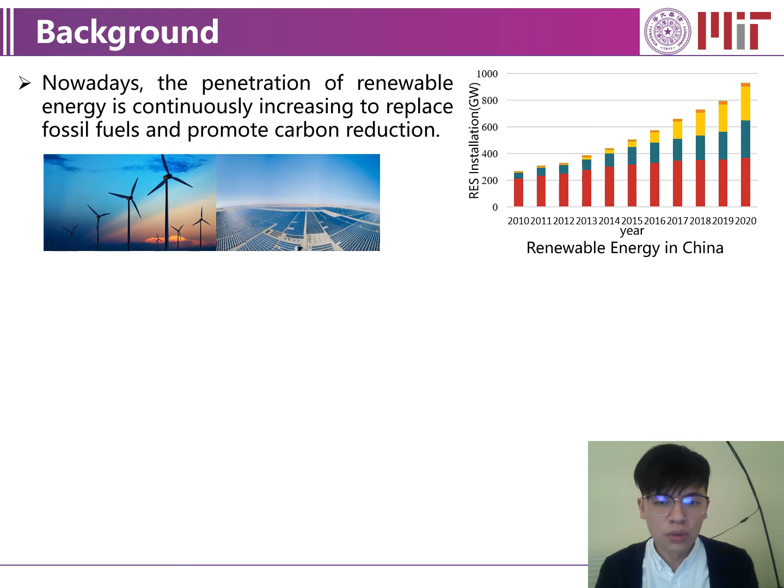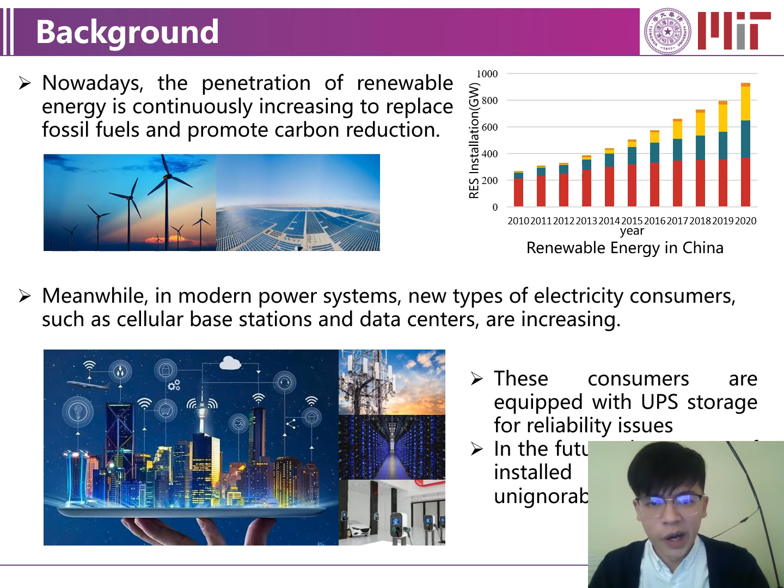Nowadays, the penetration of renewable energy is continuously increasing to replace fossil fuels and promote carbon reduction. Meanwhile, in modern power systems, new types of electricity consumers, such as base stations and data centers, are increasing. These consumers are equipped with UPS storage for reliability issues. In the future, the amount of installed UPS storage is unignorable.

On the one hand, with the increasing of renewable energy, it brings more uncertainties to power systems, so more flexible resources are needed. On the other hand, battery energy storage is a promising kind of flexible resource. So the question is, can we make use of UPS storage to provide flexibility to power systems?

Our previous work has shown that while providing reliability backup, some UPS storage facilities can have spare capacity that can participate in power systems, especially in high power supply reliability areas. And our previous work has also studied how to dispatch them or how to organize them to participate in power system frequency regulation.

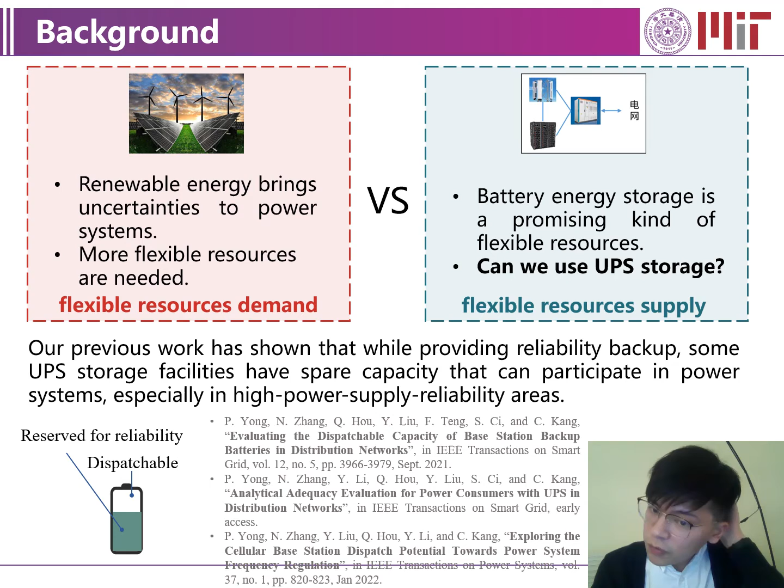In this research, we want to exhibit the contributions of UPS storage to power system load carrying ability, which is represented using capacity value. The concept of renewable energy capacity value has been widely applied in different power system analysis scenarios, and the capacity value of energy storage has also been studied by several researchers. But the capacity value of UPS storage hasn't been properly studied.

About the framework, we propose a three-stage framework to estimate the ELCC of the UPS storage. At the first stage, the power system operator calculates the system-level reliability indices without UPS storage using the sequential Monte Carlo simulation. So they provide a benchmark.

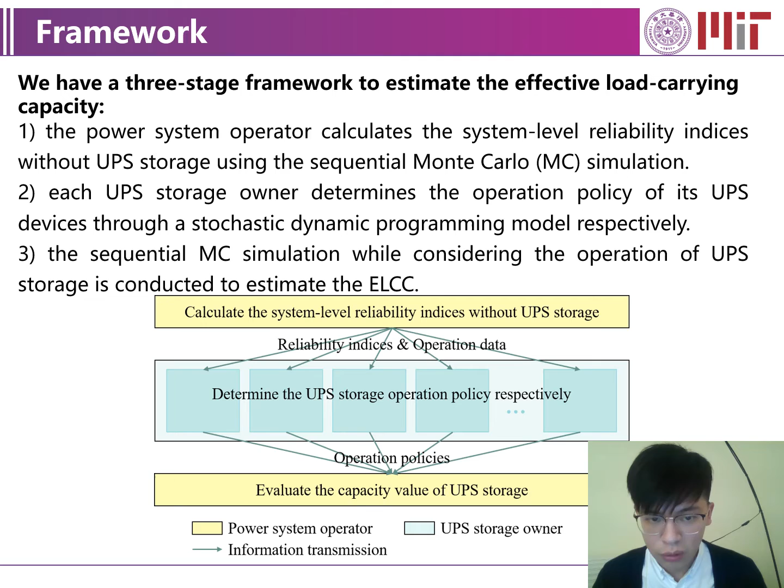For the first stage, calculating the system-level reliability indices without UPS storage, we should first build the reliability models. For the conventional generators, we use the two-state Markov model. For renewable energy, for example wind power or solar power, we can use the historical data, or generate new data using some renewable energy output model. For the power load, we sample from the historical data. The reliability evaluation time horizon is 1 year, and the sampling density is 1 point per hour.

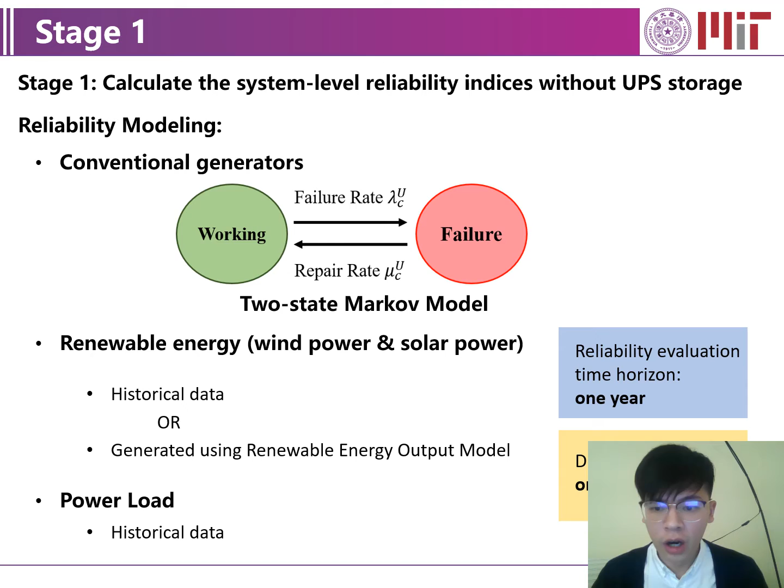Here is a simple flowchart of the sequential Monte Carlo simulation. In the first part, we sample from our reliability models. For example, for conventional generators, we sample from the Markov model. And for renewable energy and power loads, we sample from the obtained time series.

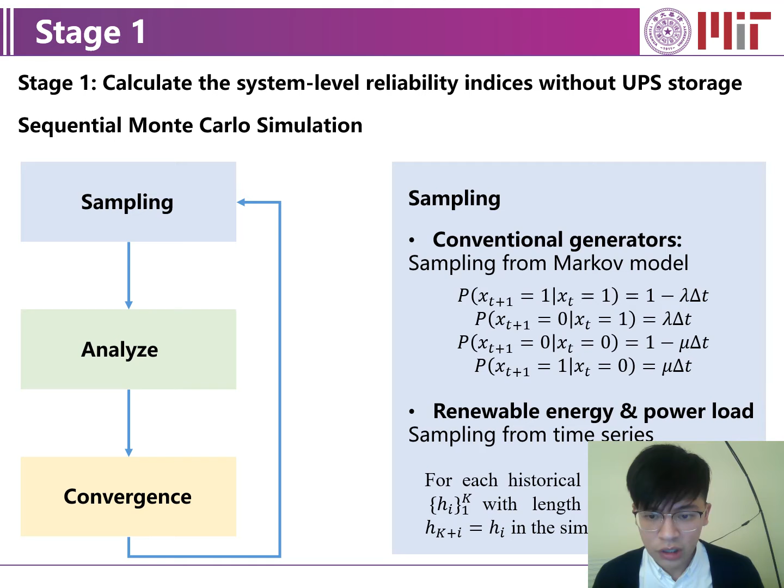Then in the second part, we analyze the obtained samples. For each sample, we judge whether the loads can be served by the generators or not. If we denote Gi and Di as the total generation capacity and the total power load at the i-th sample, we can compare Gi and Di to find whether, at this sample, all the loads can be served or not.

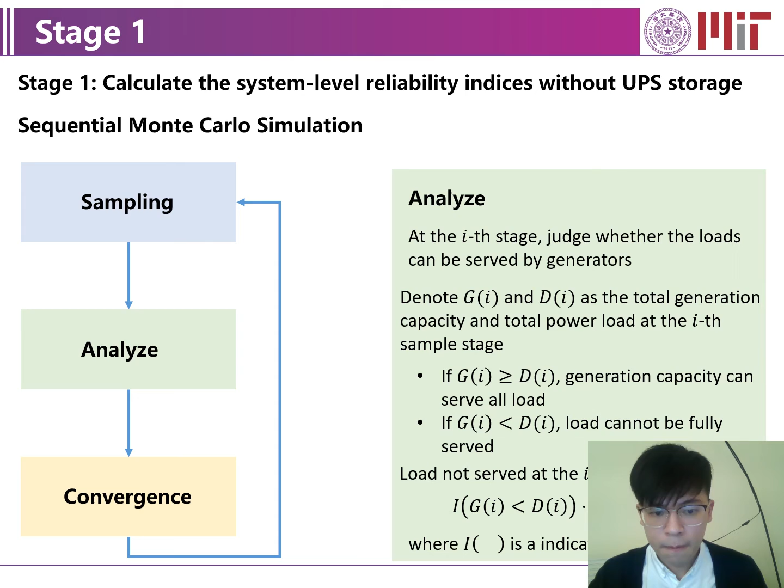Then, as the third part, we test the convergence. If the Monte Carlo simulation is converged at the current state, we output the evaluation results. If not, we return to the first part to generate more samples and analyze them, and then we retest the convergence. It's a loop until convergence is reached.

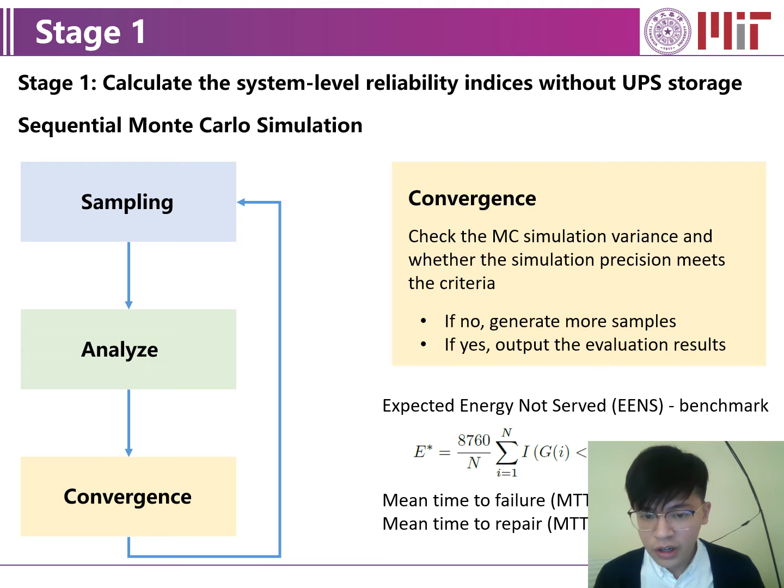Here we use the reliability index expected energy not served, that's EENS, and it provides the benchmark for the reliability level without the UPS storage. We also provide the mean time to failure and the mean time to repair indices for the following steps.

Then we move to the second stage, which is to determine the UPS storage operation policy respectively. Here we use a stochastic dynamic programming model. The reason is that solving the stochastic dynamic programming can provide policies that can be used in different scenarios, so it avoids repeatedly running optimization to obtain the state of charge of storage in each sample in the Monte Carlo simulation, so it's much more time efficient.

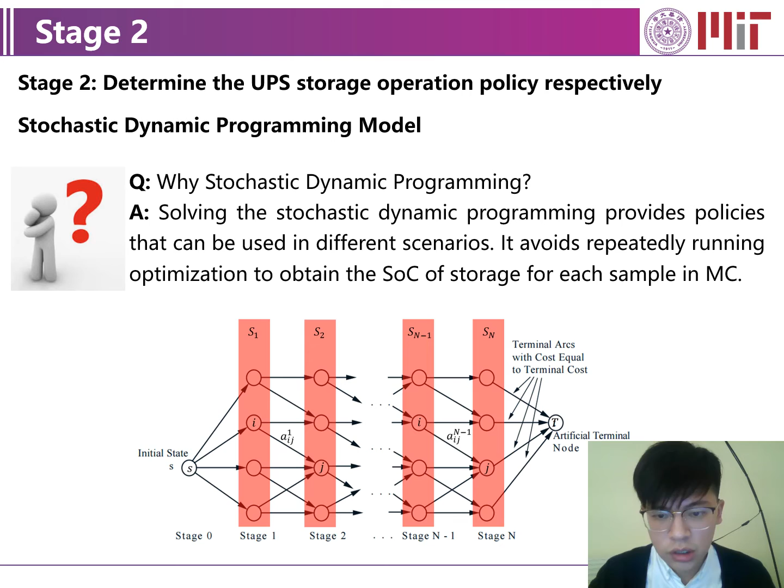Here are some model details about the stochastic dynamic programming. The decision stages of the stochastic dynamic programming are discrete in time, not continuous. The state variables at each time slot are the state of charge of the UPS storage, the electricity price, and the power system status.

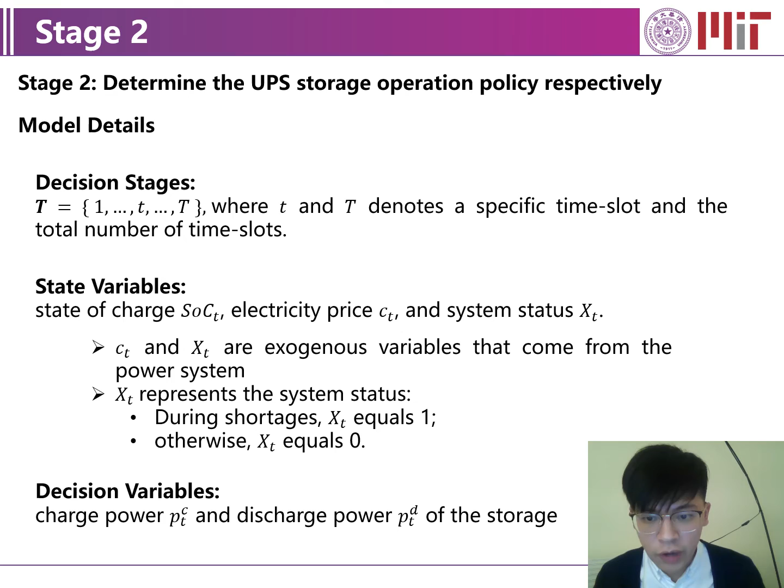Here, CT and XT are exogenous variables that come from the power system, and XT represents the system status. If XT equals 1, it means that there is a power shortage in the system. If XT equals 0, it means that there is no power shortage at this time slot. The decision variables for the model are the charge power and discharge power of each UPS storage.

The state transitions of the stochastic dynamic programming model can be divided into two parts. The first part is the deterministic part. It describes the energy conservation relationship of the UPS storage. The second part is the stochastic part. It represents the uncertainties of power system shortages. We construct a two-state discrete time Markov process to represent it. The parameters of the Markov process come from the MTTF and MTTR obtained in the first stage.

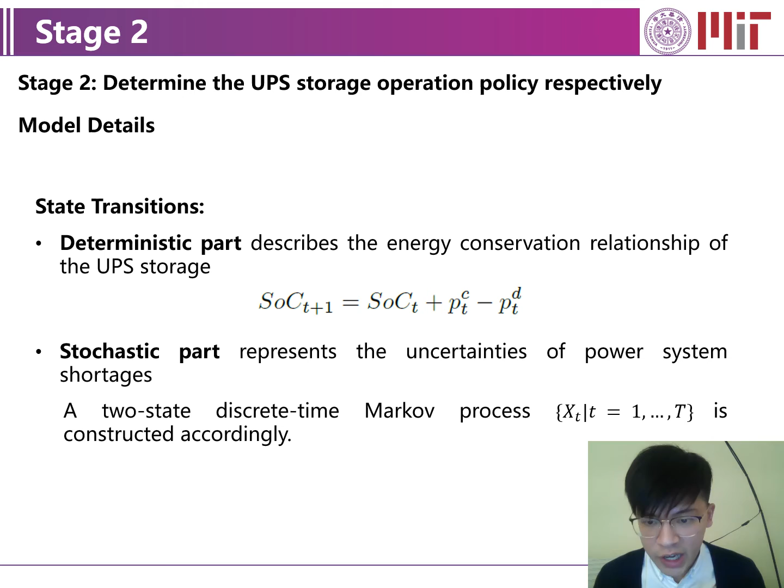As for the optimization target, we denote the state of time slot t as st, and the reward function of time slot t consists of two parts. The first part is the temporal arbitrage during normal time, and the second part is the reward from carrying load during shortages. So we use this optimization target to let the UPS storage do temporal arbitrage if no shortage happens. And if a shortage happens, we organize them to carry load as much as possible.

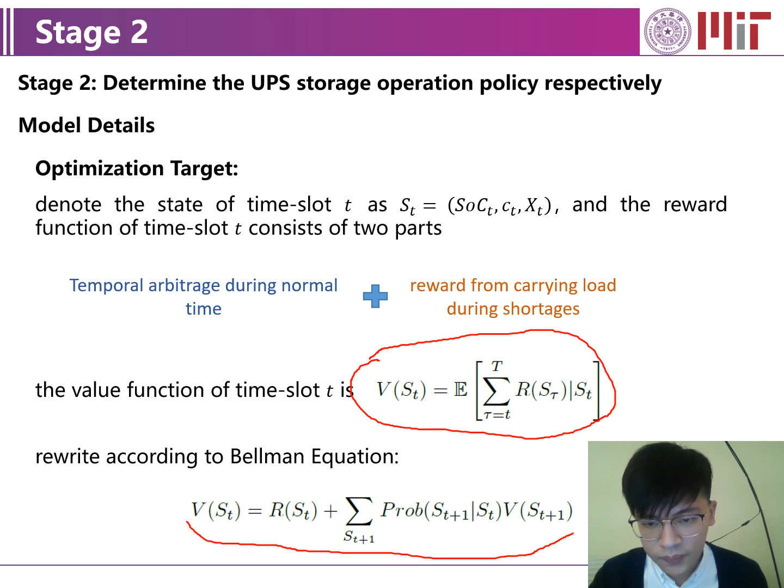The value function at time slot t can be represented as this. If we apply the Bellman equation, we can change it to this one. Then after that, we can solve this stochastic dynamic programming model. We discretize the state space and decision variables and use the backward recursion method, which is commonly used in solving dynamic programming models. Then we can get a policy table for any time slot and any possible state.

Then we come to the third stage, that's evaluating the ELCC. We also use the sequential Monte Carlo simulation here, but we evaluate the reliability with the UPS storage. So most parts are the same as the sequential Monte Carlo simulation in the first stage, but the operation of UPS storage facilities is considered here. Moreover, we add additional load delta D to the system.

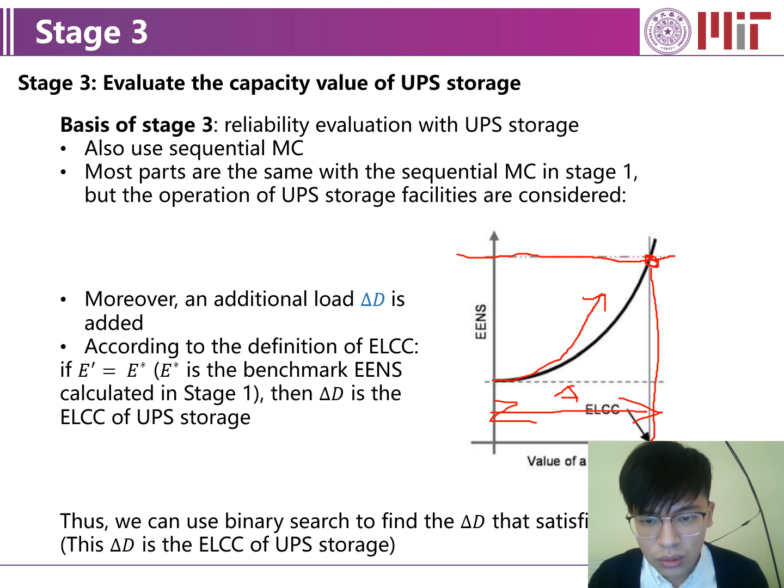According to the definition of the ELCC, if the EENS here equals the benchmark EENS, then delta D is the ELCC of this UPS storage. Here we can recall this figure, and this one is the benchmark. If we add more and more additional load to the system, the EENS increases, and at this point it equals the benchmark. So this one is the ELCC of UPS storage. We can use the binary search method to find this delta D and to find the ELCC.

As for the case study, we test this framework on a modified IEEE RTS system. We add some renewable energy to the system, and we also add some UPS storage to it. Then we test the performance.

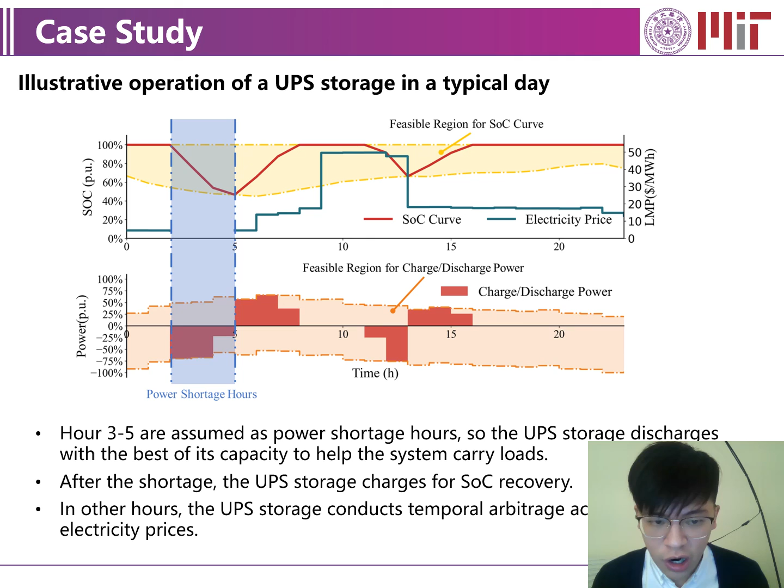Here is the illustrative operation of a UPS storage in a typical day. We set hours 3 to 5 as the power shortage hours. So during hours 3 to 5, the UPS storage discharges with the best of its capacity to help the system carry loads. After this shortage, the UPS storage charges for SOC recovery. In other hours, we can see that the UPS storage conducts temporal arbitrage according to the electricity prices.

I also want to point out that if we only have a 3-hour UPS, most of the capacity needs to be reserved for reliability issues. So only a small part can be dispatched by the power system, so its ELCC is very low. But if the duration improves, we can have more ELCC.